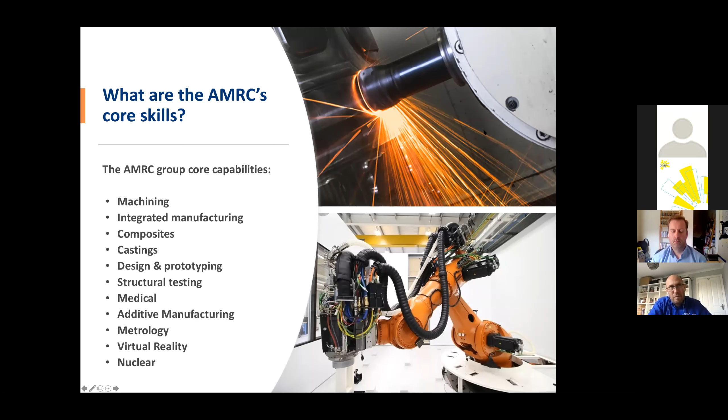In terms of our core skills, the AMRC started in 2001 and its main core skill was actually machining, and that's how the whole thing started off. But since then, we've developed more core capabilities, such as integrated manufacturing, composites, casting, design and prototyping, structural testing, medical, additive manufacturing, metrology, virtual reality, and we also have nuclear in the form of the Nuclear AMRC.

So just about the AMRC Northwest. We were established in June 2018, where there was just two of us, James and myself. We're currently very kindly hosted in an interim facility by UCLan, who we work very closely with, and that location is actually on the UCLan campus, bang smack in the town centre.

We like to say that we're actually an open access demonstrator, and we're demonstrating digital technologies. So from January 2020, we opened our doors for SMEs to come into the centre and view our technologies with a view to adopting them within their own setting. We're currently at 35 employees, but we will be scaling to around 40 to 43 from November 2020.

So quite a steep growth curve from June 2018. As you can see, the picture of the building that you saw previously at the beginning, well, that's going to be our new home from August 2021.

We've been working on the ground with a number of Lancashire SMEs since January 2019, and to date, we've delivered about 139 assists to Lancashire-based manufacturers. We're also working very closely with Made Smarter.

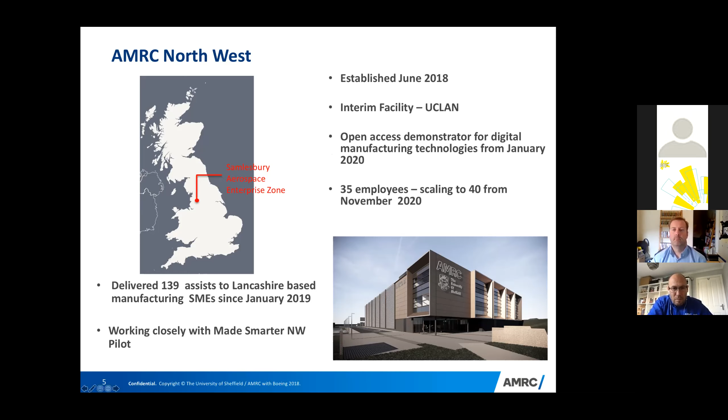In terms of what we're actually doing here, there's no point in duplicating everything that's done in Sheffield because it's only 2 hours down the road. So for example, we're not looking to do casting in the Northwest because we have one of the largest casting facilities in Europe based in Sheffield.

So our key research themes currently are battery pack assembly, additive manufacturing, robotics and automation, machining, and all aspects of digitalization of manufacturing processes. So what's commonly known at the moment as Industry 4.0.

We do recognise the fact that, within Lancashire and certainly the Northwest, industry and manufacturing does vary from what we've got in Sheffield. So we recognise that our research themes will evolve to meet local needs. We're already seeing that there's a lot of technical textile activity within the area, so we're open to evolving to meet the need.

Okay, thanks for that, Melissa. So you've had a bit of an overview about what the AMRC group is and some of the background to why we're here in Lancashire and some of the rough areas. I'd just like to run through some of our current capabilities in terms of the specific research themes.

So first up, we do quite a lot of additive manufacturing. It's been touched upon briefly in some of the introduction there, but you might be wondering why we chose additive manufacturing as one of our key areas of research.

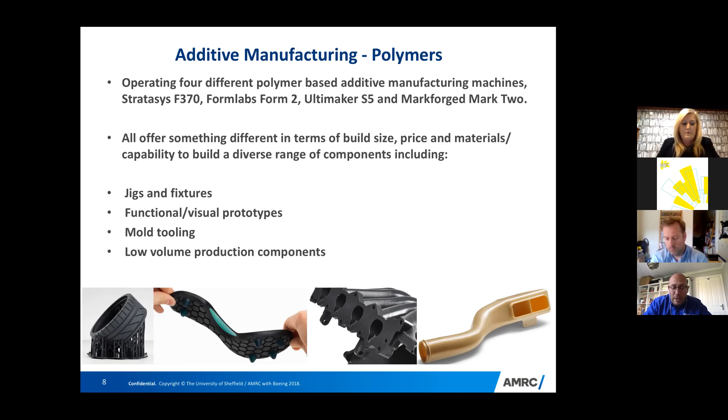And again, it's coming back to this point that we'll probably keep reiterating throughout this afternoon session: understanding how to apply it in the correct way. This is not a one-size-fits-all solution to your problem, but in certain circumstances, it fits well. And we see our role as the AMRC is helping to industrialize this process, bring it through so industry can actually use it in their everyday operations.

So beyond polymers, we do quite a bit in metallics, specifically in this case, powder metallics. Aircraft manufacturers and other manufacturers are looking to AM to solve some of the technical challenging problems they have in terms of lightweighting, as mentioned, part count reduction.

Again, we have a range of cutting edge kit here in the Northwest. We've invested quite heavily in this area in terms of current state of the art systems. The system in the image there is a quad laser system. It allows us to apply 4 lasers simultaneously to really improve that production, so we reach that price point.

One of the images I've got on the screen there is looking at something called the General Electric fuel nozzle. And again, this was a component where additive manufacturing really made sense because it gave part count reduction, it gave efficiency improvements through complex internal geometry, which just isn't achievable by any other means. And it was actually more robust, and it resulted in fuel savings.

So again, this point that we'll keep reiterating, if it's applied in the right way, then it really makes sense. And as you can see from the list there, we have the full range of pre and post-processing equipment to really validate and verify the parts that we make and the assist that we give companies.

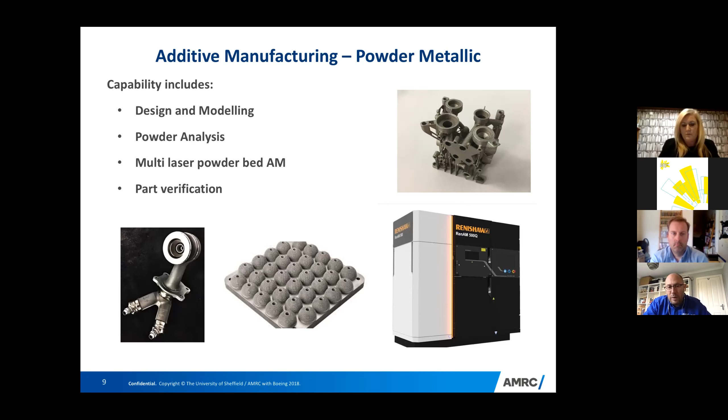So that's the very small detailed parts, sort of fit on your table size components. We're also looking heavily at larger components that won't fit on your table or would break your table. And there's a couple of images there of some of the output of some of the technology solutions we either got or we're going to have very soon in terms of wire arc additive manufacturing.

So again, this is a slightly different system of 3D printing where we actually feed a welding wire in rather than powder. And as you can see, you can build these very large near-net shaped components.

It's an alternative to some traditional manufacturing routes where, say, for instance, a manufacturer might receive a forging and then machine it to its finished form. Obviously, some of the issues there are very long lead times, very high costs in terms of making the actual forging molds,

forming processes, and this really gives you an alternative there in terms of reduction from, say, 18 months down to 3 months. It gives you options to reduce your build volumes from, say, dozens or hundreds down to single items, so you can bespoke and you can have a lot more control there. So we're investing in a couple of systems there to help industry look at this technology as a viable alternative.

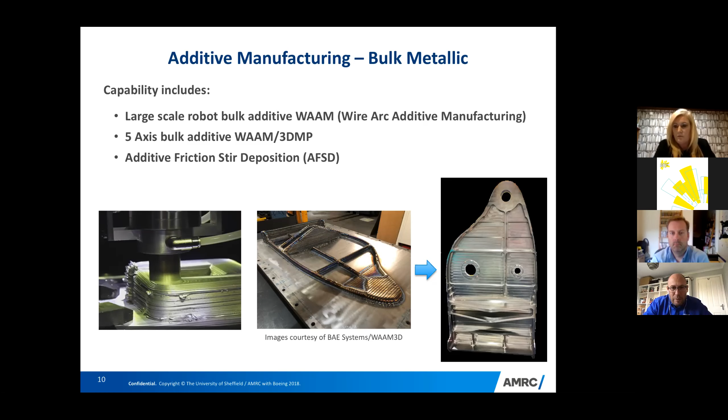And that's where we see our key role in terms of bringing on these new technologies, maturing them and debugging them to the point where industry can actively use them. And as my old boss used to say, if there's no industry pull for any of this technology, it's just your hobby. And we're really keen to make the point today that we align ourselves with what industry needs, because otherwise it's just our hobby, and that's not what we're about.

As Melissa outlined, one of the core competencies of our main group is machining. We've been doing that for more than 20 years now. So it made sense to bring that into the region as well.

There's a lot of industry in the area that uses machining technology, and we're investing in a number of multi-axis machine tools there to allow us to help SMEs with the latest and greatest techniques, but also supporting our near net shape activity. So the ability to machine to finish component, some of the additively built parts is crucial.

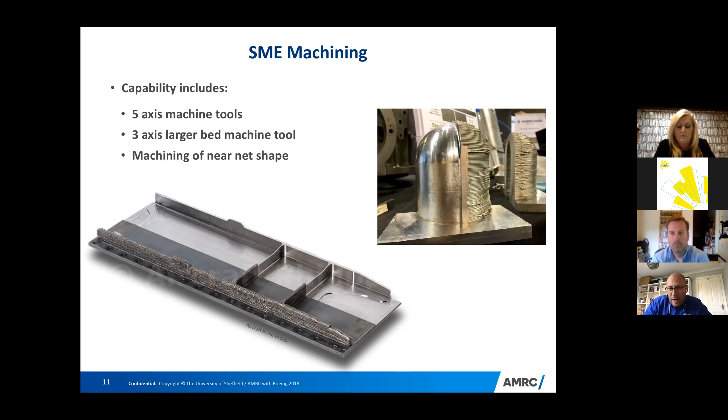Understanding how they respond from a traditional process is important. And again, it's bringing best practice into the region. Some of the examples of that best practice are things like, how do you select the correct cutting tools? What are the new developments in tools in terms of manufacturers' products out there? How do we do offline modeling to minimize distortion or increase productivity?

So we approach this in terms of, we're there to prove or disprove some of the sales spiel you might get from some of the manufacturers, and to give manufacturers an agnostic view of the world in terms of how do you make your product quicker, cheaper, greener, whatever your output that you're measuring is. How do we help you get to that point by the application of new technology? So it's very much what we're looking at as well.

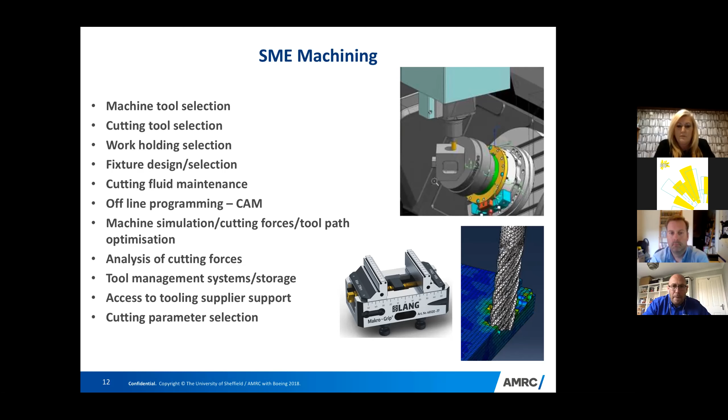Obviously, we can't make things multiple times faster with new processes without actually verifying what we're doing. It's a key part of what we do, and it gives us credibility in terms of helping manufacturers with real world problems. So we've got a range of technology there looking at how we measure and verify from multi-metre componentry, accurate geometries, down to small micrometer defects within, say, an additive build or a machined component.

And an additional element to that—apologies for my dog in the background—is understanding the function that reverse engineering can have, particularly with additive manufacturing. It allows us to look at the way components are made in an existing way, and maybe do a bespoke one-off via additive manufacture.

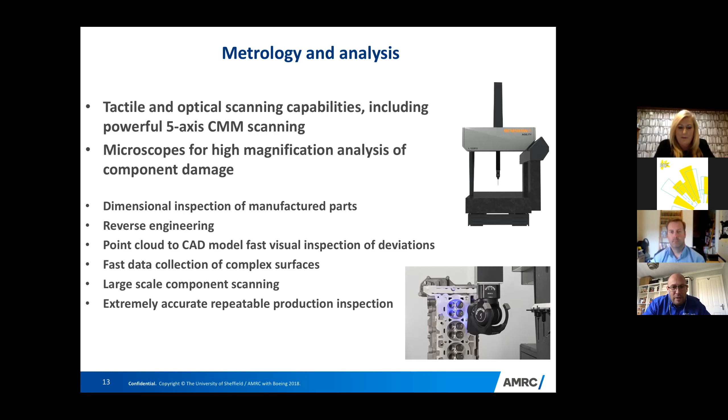As Melissa said, we're not duplicating what we're doing within the whole group within the Northwest region. One of the unique areas is battery electrification. Obviously, as we're all aware, electrification of transport is a key thing at the moment, low carbon initiatives. And it made sense to apply some of our flexible and intelligent automation techniques to the problem of making the battery packs for both automotive and aerospace.

So we've got a range of kit there where we can look at things like joining techniques for electrical connections. There's obviously thousands of these within a pack, and they need to be very robust. So we're looking at new techniques around laser welding and heavy wire bonding of connections for alloys with high reflectivity and very thin sections. It's quite a challenge.

And obviously we've got the testing kit there that we can look at individual cell level testing, performance testing, all the way up to module and pack level. So it's quite a unique capability within the region, and it's allowing us to look at different market segments and help other manufacturers.

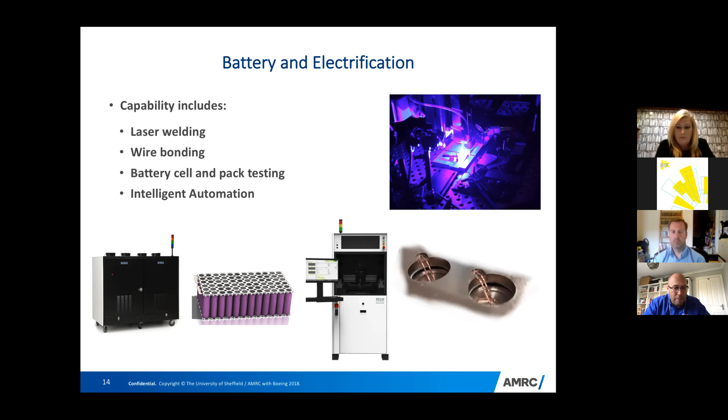Obviously, there's quite a lot of talk about digital at the moment. Industry 4.0's quite topical. We have an array of themes where we help industry, from very large projects—we recently announced a 5G manufacturing testbed—all the way through to very small assists where we're helping manufacturers put sensors on legacy equipment, and everything in between, to be honest.

So things like discrete event simulation, where we can simulate plant and factory layouts and the processes, AR and VR simulations of new products to allow people to visualize them within a realistic setting, and things like embedded sensors and human in the loop. So a range of technologies there that we can help companies with, of all shapes and sizes, at different points on the implementation ladder.

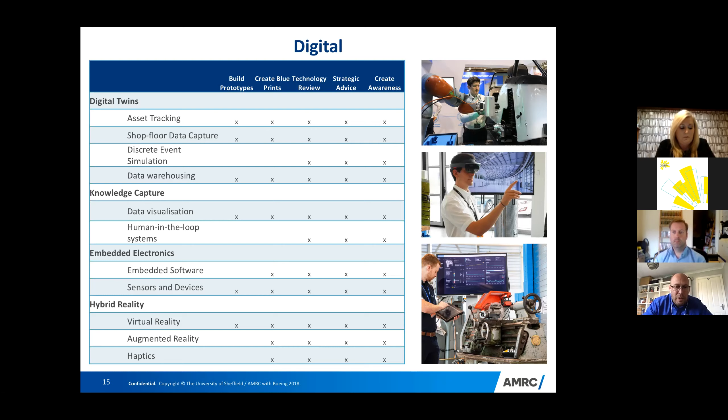So this is all well and good, you're saying, but what does this mean to Lancashire manufacturers? Well, at the moment, we are running an ERDF, European Regional Development Fund, programme to assist SMEs within Lancashire on a range of topics that we've just discussed.

So additive manufacturing is a key one, and we're going to come on to a case study very soon where we're going to look at a real world example, through to the simulation side of things, and things like CAD design, software selection, that kind of thing.

So we've got a range of offers to the region. We're very much excited to be here, and very proud that we were supported to come into the region with some of the technology we're offering.

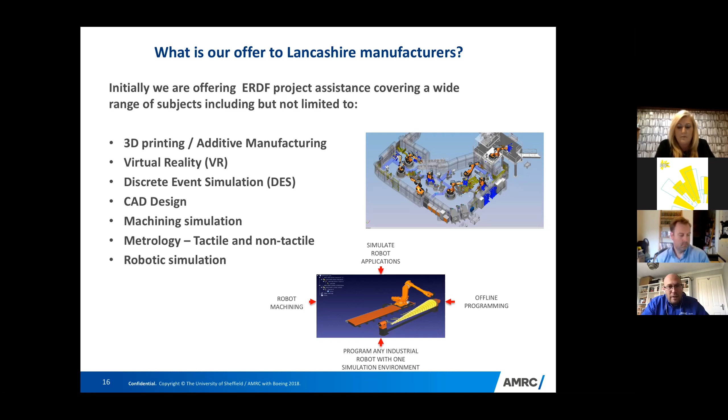So hopefully that's given you an overview and you found that interesting in terms of some of the areas we're looking at. I'd now like to hand over to Melissa, who's going to explain a little bit more about our SME program and how you might engage with that. And then we've got a short video just highlighting some of the other SME assists we've been doing.

So from our videos, you'll actually be able to see that the AMRC not only undertakes huge research projects for large companies, but we also work a lot with smaller SMEs. Since January 2019, we've actually assisted over 120 Lancashire SMEs through our fully funded ERDF programme. We've provided support in a diverse range of technologies, for example, additive manufacturing, digital transformation, virtual reality, discrete event simulation, robotics, automation, electrification, process improvement, and machining, just to name a few.

Our programme of fully funded ERDF assists for local manufacturers will continue till around June 2023, shortly after which the access to European business support funding unfortunately will cease. Typically, we offer a minimum of 12 hours support in any of the research themes we've talked about, and currently the most popular areas seem to be additive manufacturing, machining, and digital transformation strategies.

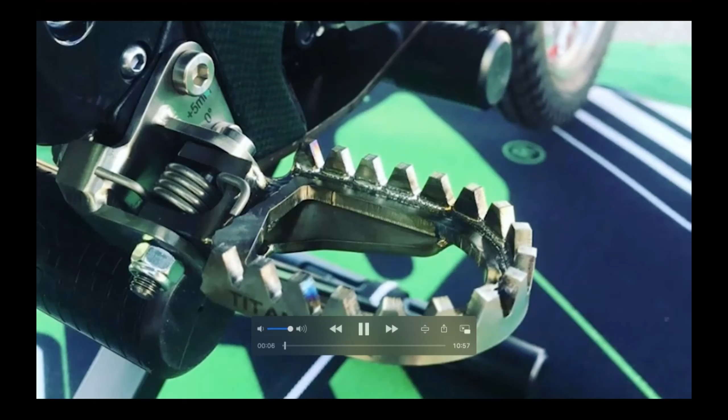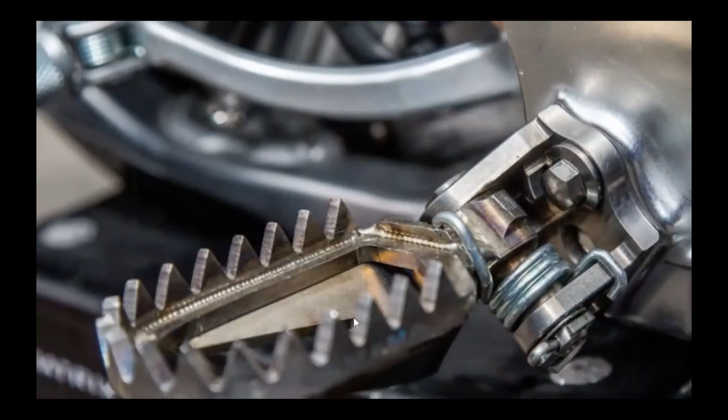In the following video, we will be discussing the work that AMRC Northwest has been doing with Raptor Titanium, a local manufacturing SME we've been working with as part of our ERDF SME engagement programme. We'll mainly focus on the laser powder bed fusion additive manufacturing technique to highlight the basic workflow steps involved. During the AM design review with Raptor, it was clear there were opportunities for laser powder bed with their products, namely lightweighting, consolidation of parts, lights-out manufacturing, and customization.

Customization in the form of a rider's weight or feel. Here on the desk you can see some laser powder bed applications, broadly split into families of parts: a group of components that suit the medical sector, a group of high temperature applications processed with nickel alloys, some fluid transfer devices showing elements of lightweighting, and some more specific lightweighting elements. This component is topologically optimised using software to remove material where it's not needed, thus minimising mass.

And it's this approach that we've taken for the project with Raptor Titanium.

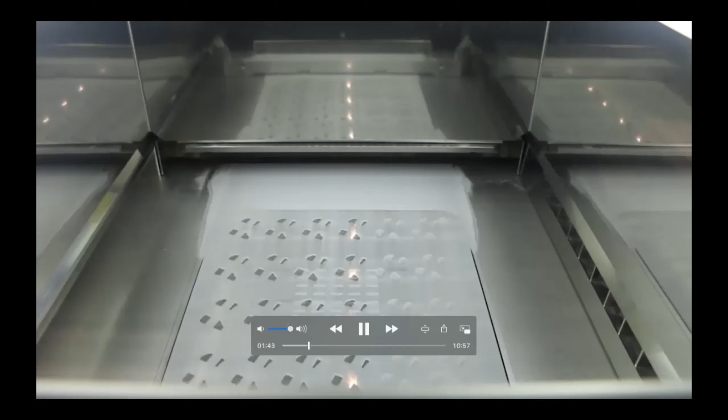There are many different types of AM technologies. Broadly speaking, they can be categorized into polymers and metallics, and then further broken down into feedstock, deposition, and the heat source each machine uses to consolidate the material. What we have here is a laser powder bed fusion machine from Renishaw. The significant differentiator between this machine and others on the market, including some older Renishaw equipment, is the number of lasers - this machine has 4 lasers on board to really up that productivity rate.

With laser powder bed, we are limited to materials available in powdered form from an atomizer. So for us, typically that would be nickel alloys, titanium alloys, and aluminium alloys.

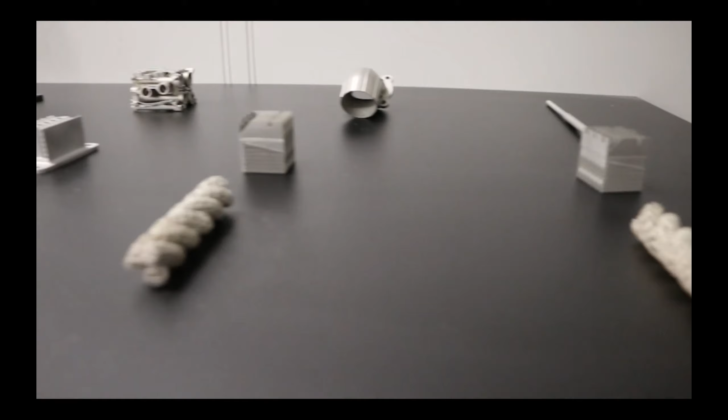Here at the AMRC, we're not limited specifically to the laser powder bed process. We have wire arc additive manufacturing capability, we have additive friction stir deposition technology from Meld Manufacturing in the US, and we also have another WAAM capability coming from a company called Gefertec that will be due in the latter parts of 2021.

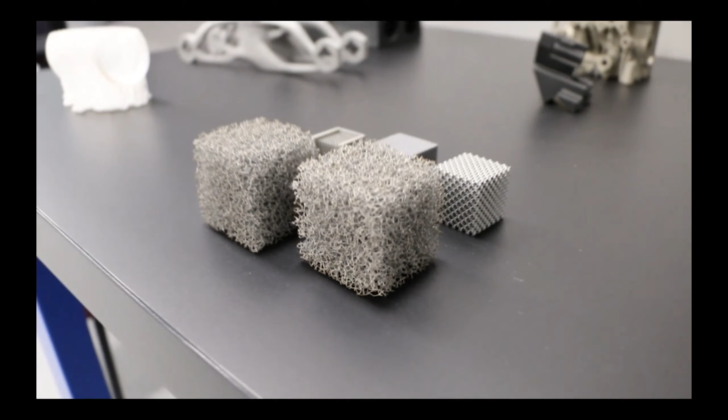There are a number of barriers to adoption for laser powder bed in industry, namely productivity and therefore cost, qualification, and design. It's the design element that's really been brought out in this project, to get the benefit out of laser powder bed by completely optimizing the design of the component.

My name's Chris Williams, I'm an engineer at AMRC Northwest. As part of our SME engagement with local engineering firms, we've been working with Raptor Titanium, a manufacturer of titanium off-road motorcycle foot pegs. They wanted us to do a study to see if we could redesign their foot peg design for use with laser powder bed fusion technology.

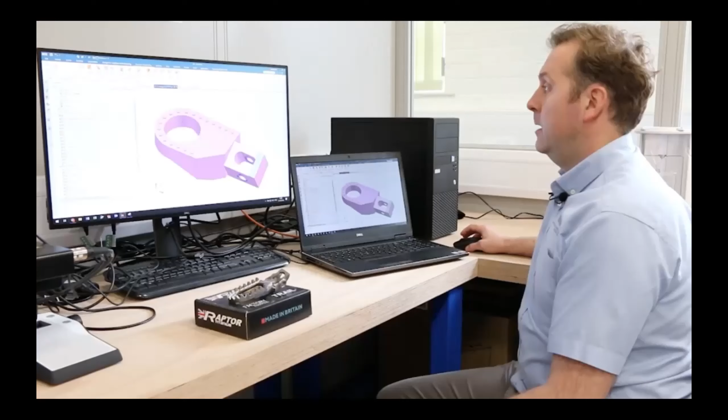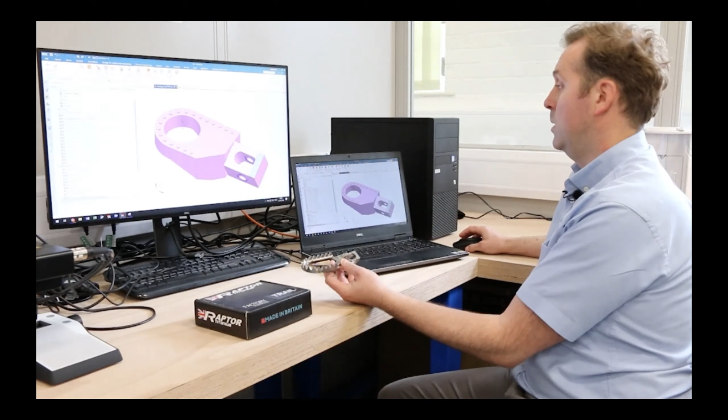The approach to the design is to use topological optimization, which comes under the overarching banner of a generative design tool. So what we do is take the geometry from an existing component and create quite a simple blocky model that shows them the overall design space.

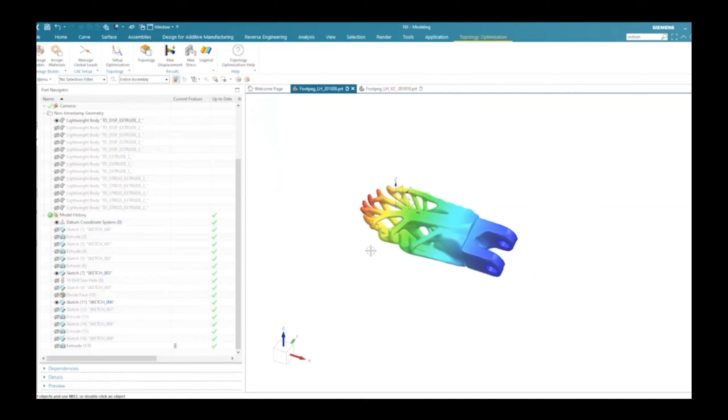We then apply constraints, loads, and the material to this model, and then we run the analysis. That will then produce us a stress plot which shows us where the energy is being forced through the volume. This then gives us the basis of our new laser powder bed design.

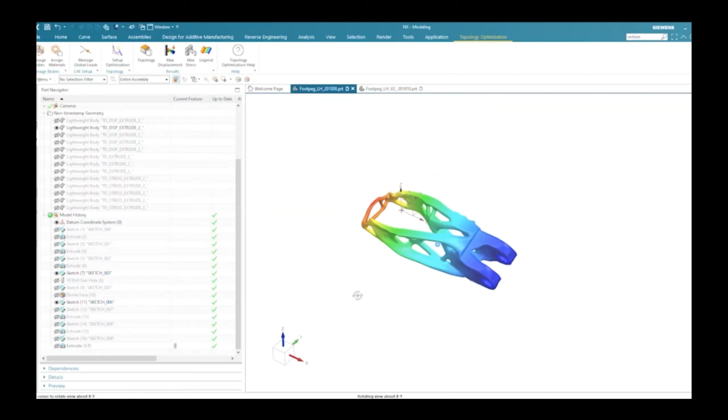Once you have the topological optimization study, there are a number of different approaches you can take to develop the end geometry that will be used to build the part. For this component, I've chosen to use the study as a guide and then use standard design methods to create a geometry that will build for laser powder bed, so it is optimized for that technique.

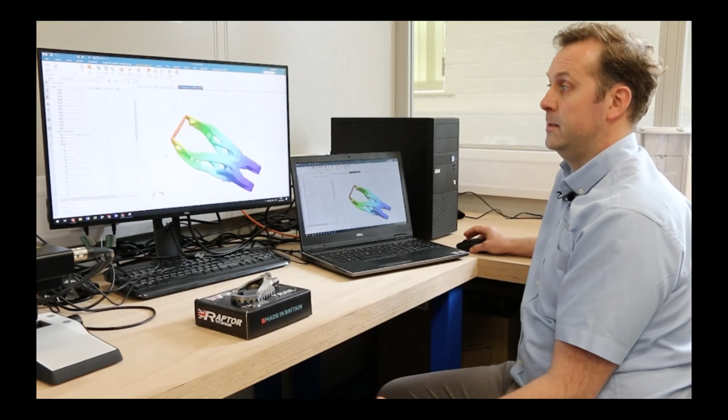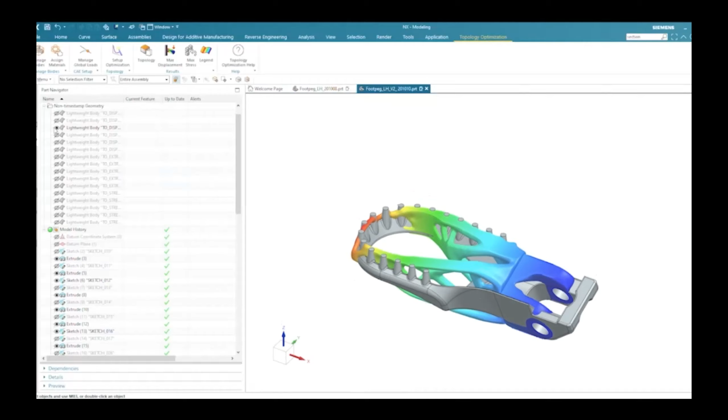So what I've done is block out the design. You can see it building up now around this study, using geometry that I know will work for the laser powder bed technique. There's quite a lot of steps in the tree because the geometry is reasonably complicated.

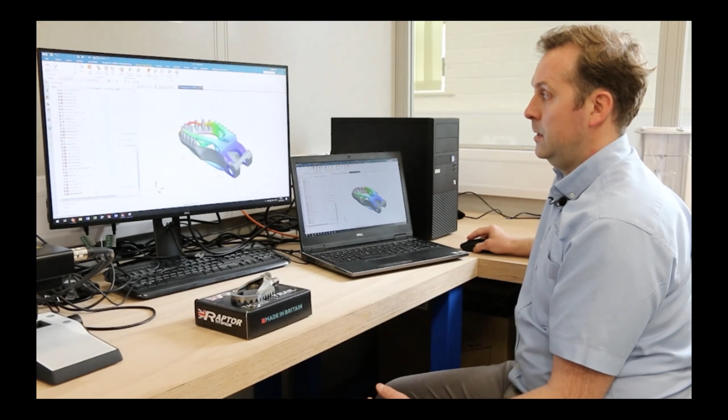The end result is geometry that we know will work well for the machine of choice and has the minimum amount of support material, but meets the prerequisite requirements of the customer for weight and strength, and ultimately must meet a price point.

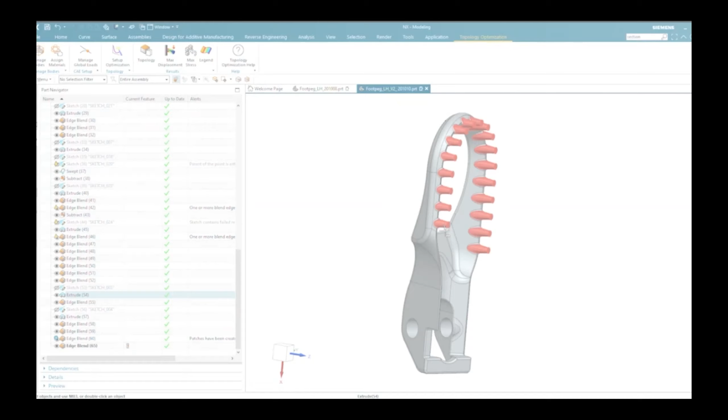So when we receive the CAD output from Chris, we're able to bring it into the build preparation software. It's here where we can orientate the part, assign any supports we need, instance the part for productivity so we can populate the bed with these components, assign multiple lasers to the part, assign scan parameters associated with the laser, and export a build file ready to be built on the Renishaw laser powder bed machine.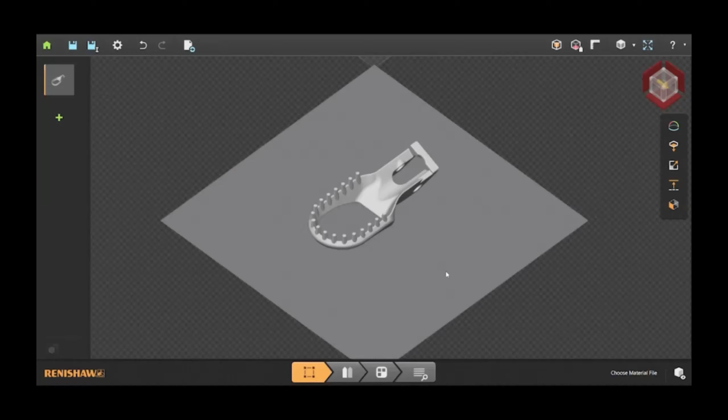So the build preparation software is really quite intuitive, with a standardized workflow running from left to right. The first step is always to orientate the part, which you do by selecting the downward surface, flipping the part to its chosen orientation.

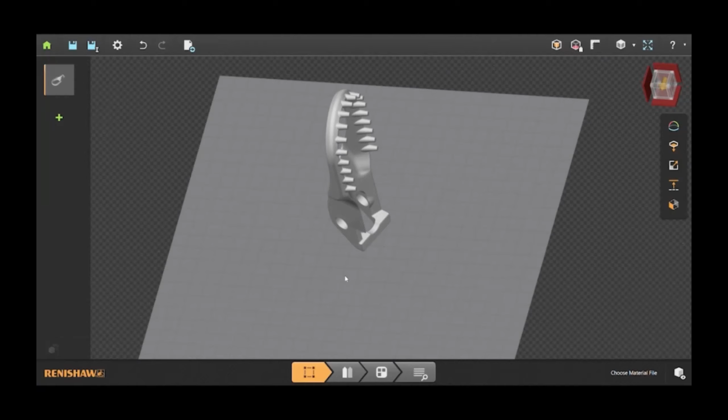Secondly, we'll choose a material file. This is a file which contains all the associated laser parameters and things that the build file will need.

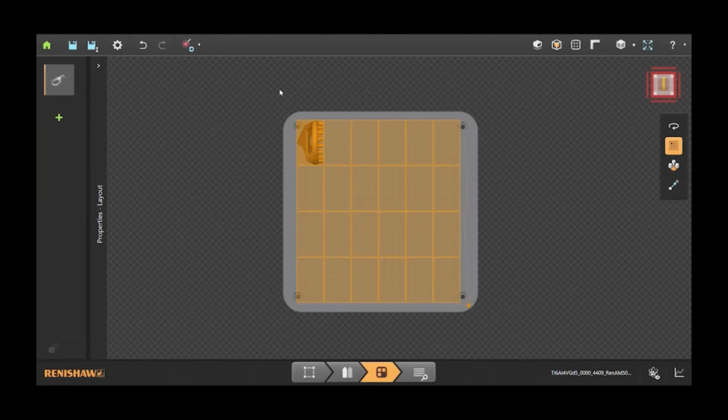We can then move down and move the part around. If we stick it up in this top left corner, it gives us some room to be able to instance the part - by instancing I mean making multiples of the part, so we can fill the whole build volume with components. With the multi-laser machine, we're able to address each individual row of this build with individual lasers.

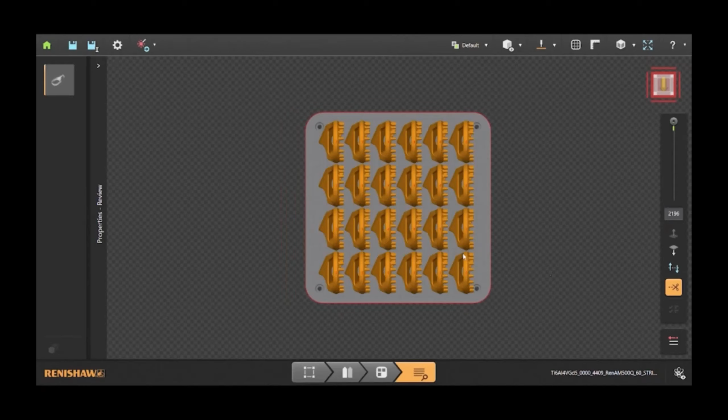So last of all, we'll go through the slicing and hatching portion of the build preparation. It's here where we slice a part up into 60 micron layers in this instance, and we assign all the laser parameters. You see in the top right corner the scroll bar, and we can use this to look through each and every layer, zooming in to look at each scan path in detail.

And then we can zoom out and use the feature here on the bottom to look at the laser running from left to right, from start to end of that layer, and see what the laser does at any one time.

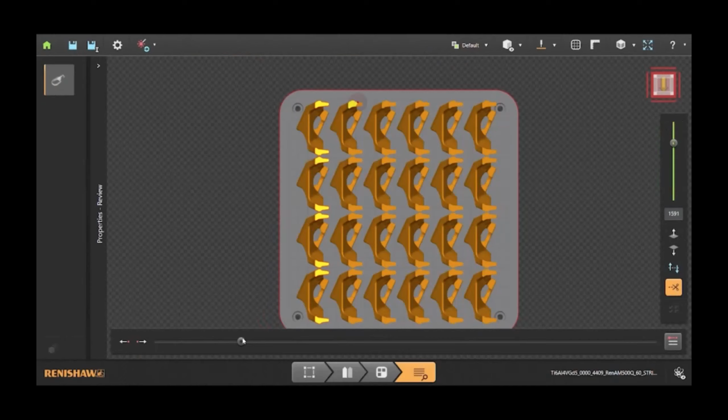Further zooming in there, we can scroll through in detail and look at every single scan path. So when this operation is complete and we have each slice, we can send that build file over to the machine.

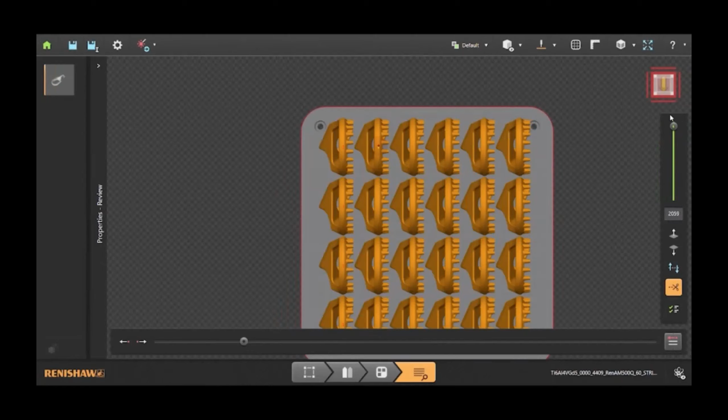So the digital twin is quite a buzzword in manufacturing at the moment. With this process, we have the capability to look at the process itself in detail.

There are 3 photosensitive diodes in the machine, one which looks at the laser power and 2 which look through the optical train at different wavelengths of laser light for the process. So it's here that we're able to zoom in and visualize what was happening at any given point, at any given time, throughout the build.

I've already preloaded the volume file, which is the file that the process monitoring software requires. It's definitely worth saying at this point, this is still quite a manually intensive process, so you do have to scroll through each and every layer in order to see any defects.

But if we just look at Z, this is the process monitoring data in the Z plane. This is a cut plane through X, and this is a cut plane through Y. So we are able to look at it in really some detail.

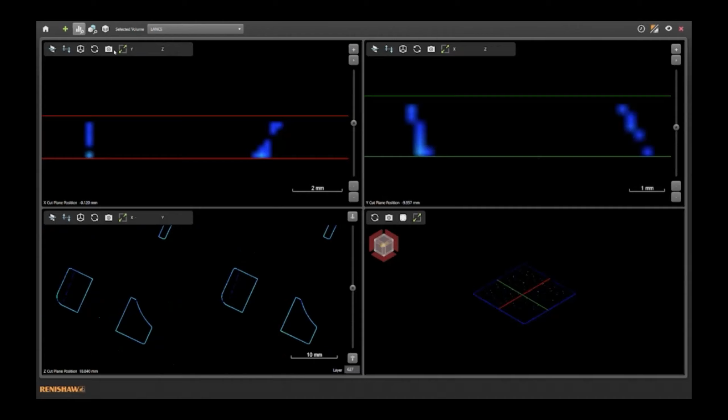You can see here what I've managed to do is threshold the data out, so you can see this Gaussian distribution of what are common data signals coming from the photosensitive diodes. We can actually threshold that out.

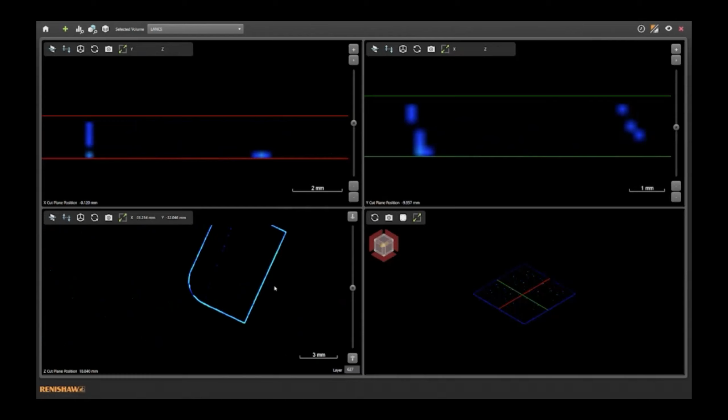And then what that leaves is a scan around the edge. So we would expect that these signals are different in laser powder bed to the scans in the middle. But what we can also identify are these erroneous signals down the middle of this section of a part. And further, they are carried over into this part as well on this particular layer.

So the state of the art of this kind of software now means we're able to track down a possible defect and its location within the part. It would then need further analysis using non-destructive techniques. X-ray CT would be a common one, and other methods, in order to track down if this was indeed a defect or some other erroneous signal coming from the photosensitive diodes.

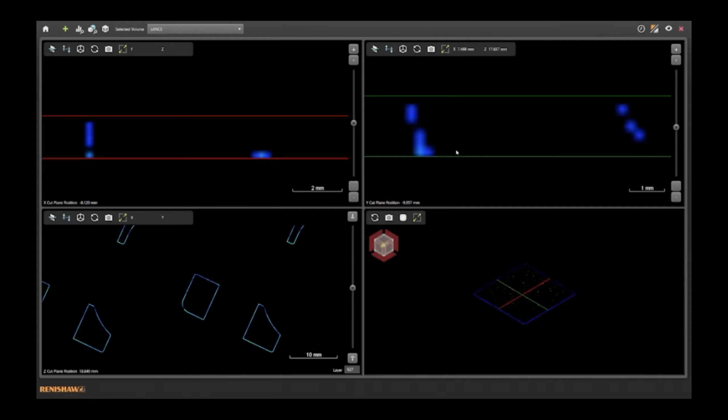Well, hopefully that gave you a good overview of a real-world application of some of this technology, and some of the process steps and the real in-depth knowledge you need.

To understand where it will work for you and where it won't. Unfortunately, we're not quite at the point where it's Star Trek world, where we tell the computer we want a component and out it pops the other side with some powder in at the other end. So it is developing. We do see a big market for this in helping companies bring this through into their production processes. But unfortunately, it doesn't work magic at the moment.

And one of the things of magic it doesn't do is produce the part for us in time for the video filming, unfortunately. So we'll save that for next time in terms of showing you what it actually looks like. So apologies for that, for everyone out there waiting to see what it actually looked like.

As we've been quite video heavy on this seminar this afternoon, we'd like to end our overview section with another video, just to show you some of the breadth of engagement with SMEs we have throughout Lancashire and throughout the country. So for the final video, Dan, please could you cue up video 3?